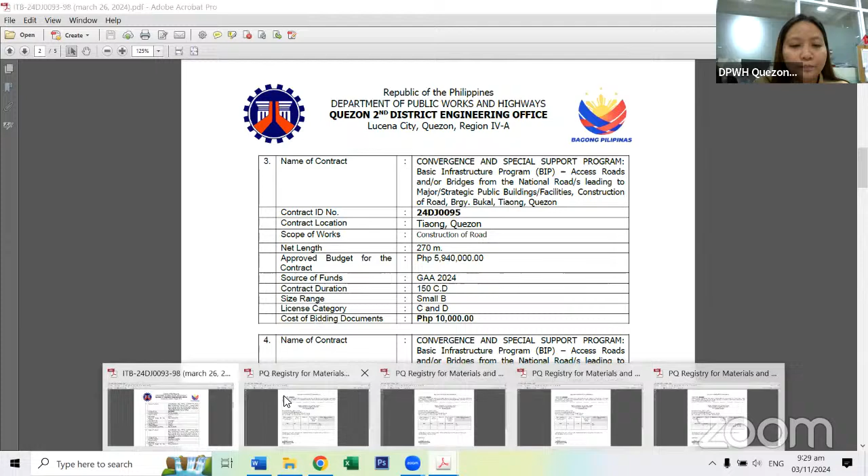Contract profile for 24DJ0095. Major categories of work RCP. Dimension 0.270 kilometers, and cost estimate for major categories 5,940,000 pesos, and similar categories of work RRP and RCTP.

Number 4, Convergence and Special Support Program, Basic Infrastructure Program, access roads and or bridges from the national roads, leading to major strategic public buildings, facilities, construction of road, Barangay Kinatihan 2, Candelaria, Quezon Province.

Contract ID number 24DJ0096. Net length 274.5 meters. Approved budget for the contract 5,940,000 pesos. Source of funds GAA 2024. Contract duration 150 calendar days. Size range small b. License category C and D. Cost of bidding documents 10,000 pesos.

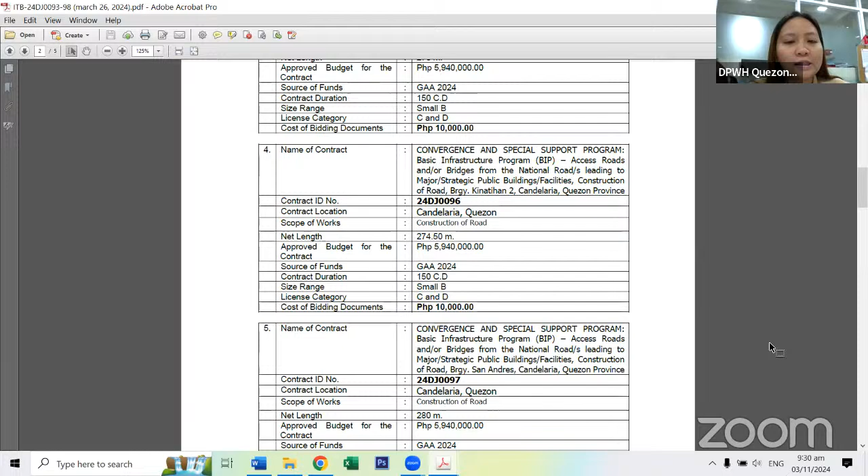Contract profile for 24DJ0096. Major categories of work is RCP. Dimension of 0.2745 kilometers. Cost of major category is 5,940,000 pesos. Similar major categories, RRP and RCTP.

Number 5 project, Convergence and Special Support Program, Basic Infrastructure Program, BIP, access roads and or bridges from the national roads leading to major strategic public buildings, facilities, construction of road, Barangay San Andres, Candelaria, Quezon Province.

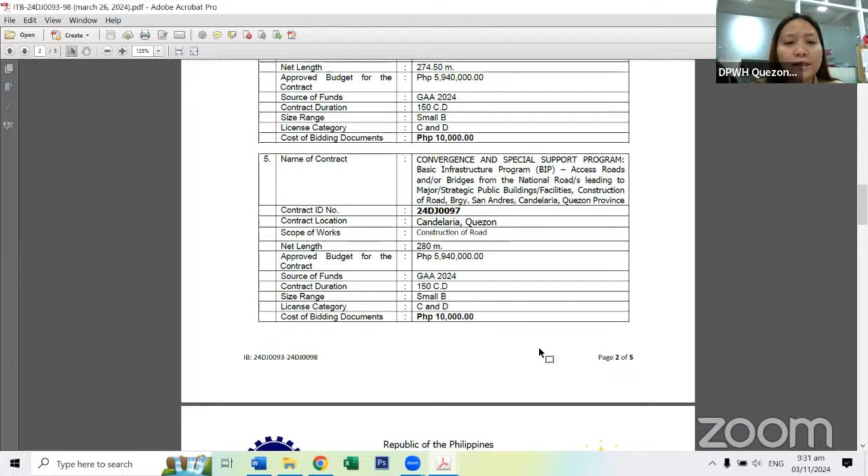Contract ID number 24DJ0097 with net length of 280 meters, ABC 5,940,000 pesos. Source of funds GAA 2024. Contract duration 150 calendar days. Size range small b. License category C and D. Cost of bidding documents 10,000 pesos.

For the contract profile of 24DJ0097, major categories of work RCP with a dimension of 0.28 kilometers and cost estimate of 5,940,000 pesos. Similar major categories of work are RRP, RCTP.

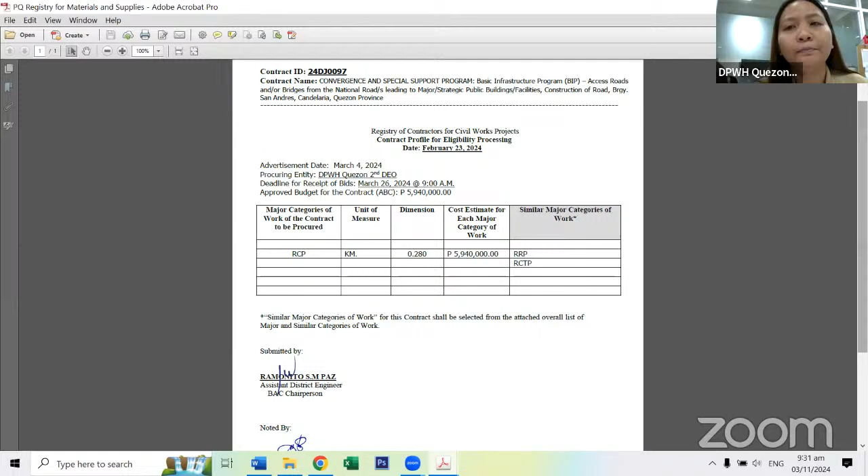Last project, Convergence and Special Support Program, Basic Infrastructure Program, BIP, multipurpose buildings, facilities to support social services, construction completion of multipurpose building evacuation center, Barangay Lutucan, Malabag, Sariaya, Quezon.

Contract ID number 24DJ0098. Approved budget for the contract, 4,950,000 pesos. Source of fund, GAA 2024. Contract duration, 180 calendar days. Size range, small b. License category, C and D. And cost of bidding documents, 5,000 pesos.

For the contract profile of 24DJ0098, major categories of work, BICWOPLS, 1 story, cost estimate of major category of work, 4,950,000 pesos. Similar major categories of work: BICWPHSCP, BICWPLSCP, BICWPHSDP, BICWPLSDP, BICWOPHS, BIH, BIL, BIM.

Bid opening is at March 26, 9 a.m.

First project po sa programmer. Start na po. Thank you. Good morning po. First project po natin is...

24DJ0093 is Convergence and Special Support Program, Basic Infrastructure Program, Access Roads and/or Bridges from the national roads leading to major strategic public buildings facilities. Construction of road, Barangay Tamisian, Tiaong, Quezon.

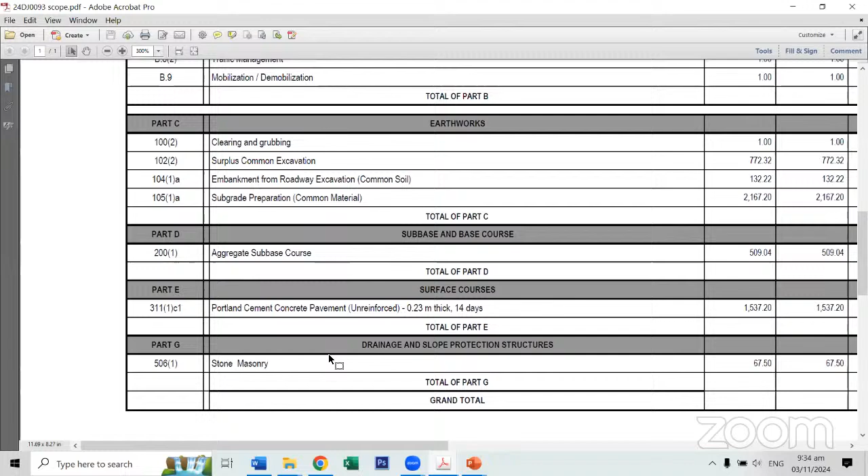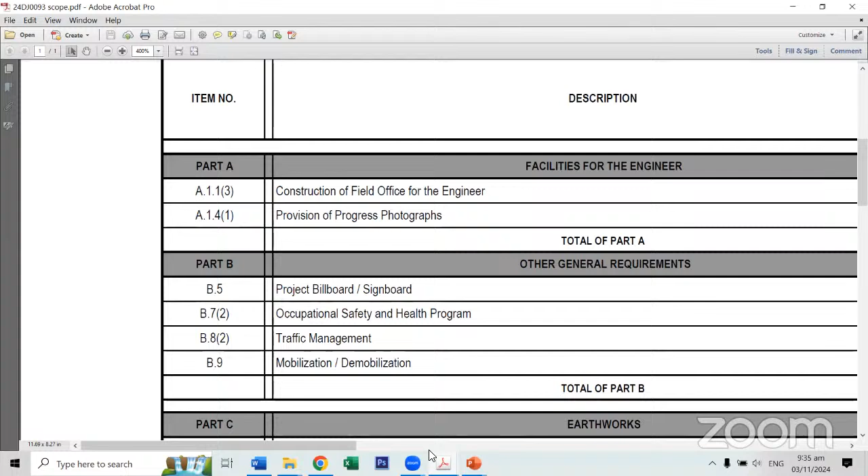Scopes of works. For scopes of works, we have Part A, facilities for the engineer, construction of field office for the engineer. We also have provision of progress photographs. For Part B, other general requirements, we have project billboard, signboard, occupational safety and health program, traffic management, mobilization and demobilization. For earthworks, we have clearing and grubbing, surplus common excavation, embankment from roadway excavation for common soil, and subgrade preparation for common material.

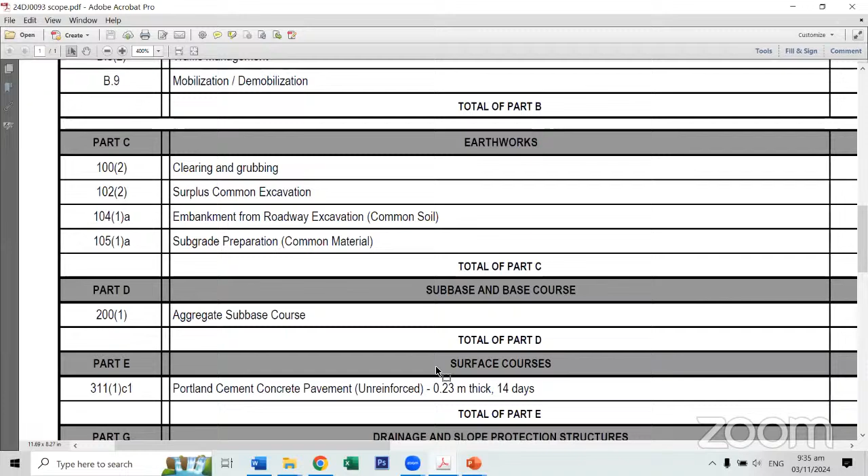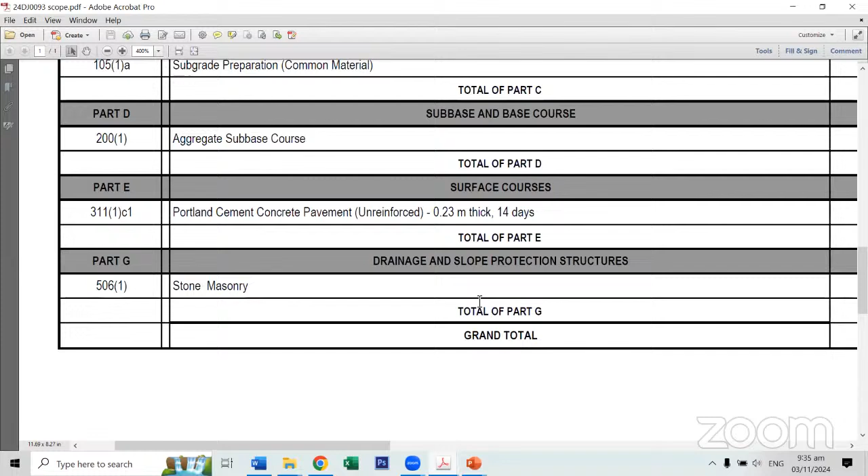For sub-base and base course, we have aggregate sub-base courses. For surface courses, we have Portland cement, concrete pavement, unreinforced, 0.23 meter thick, 14 days. And for drainage and slope protection structures, we have stone masonry.

Minimum equipment requirements: one portable mist-based sanitation test, one thermal scanner with rechargeable battery, one power sprayer with complete accessories, one low bed trailer, two dump truck, two backhoe, one bulldozer, one payloader, one motorized road grader, one vibratory roller, one water truck, two concrete vibrator, one concrete screeder, one concrete saw, one bar cutter single phase 25 millimeter, one sealer joint, and one chainsaw.

For the manpower requirements, we have one project manager, one project engineer with total 5 years experience, accredited materials engineer, one construction foreman, one first aider, and one safety officer.

The approved budget for the contract is 5,940,000 pesos, and the contract duration is 150 calendar days. Thank you. Thank you po, Engineer Dan. Any questions po?

Let's proceed to the next project.

Next project is contract ID 24DJ0094, the Convergence and Special Support Program, Basic Infrastructure Program, Access Roads and/or Bridges from the national roads leading to major strategic public buildings and facilities. Construction of road, Barangay Pahinga Sur, Candelaria, Quezon.

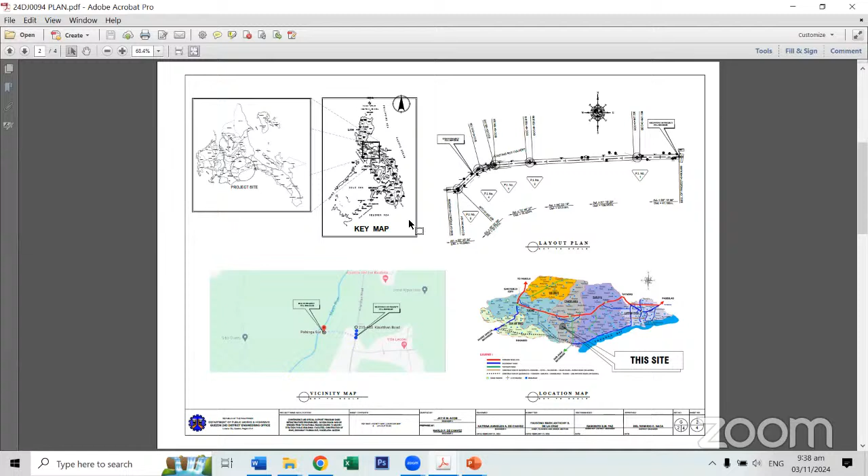Plans of the proposed project. This page shows a title page with the net length of 220.5 meters. This page shows the layout plan, the location map, and the vicinity map of the project. This page shows the summary of quantities. This page shows the typical road cross section, the straight line diagram, and the construction notes.

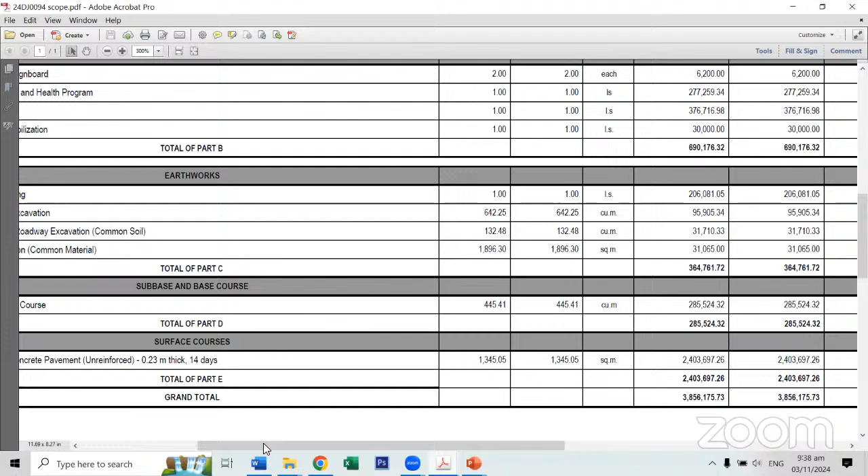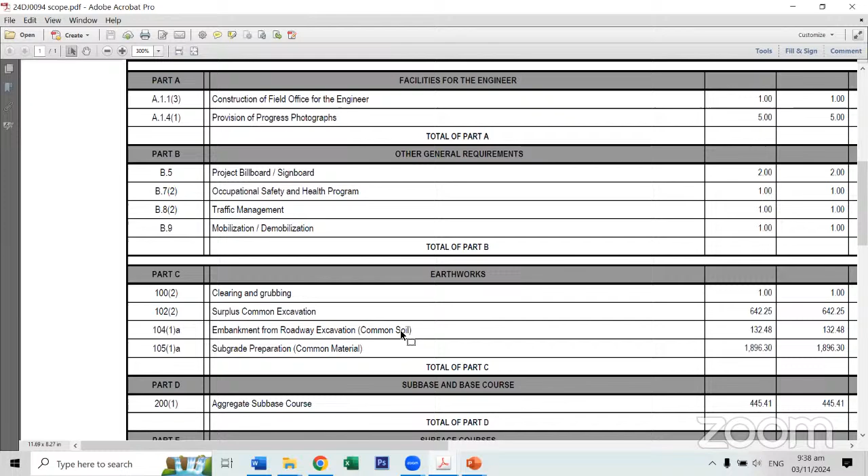Plans of the scopes of works. For the scope of works, we have facilities for the engineer, construction of field office for the engineer, and provision of progress photographs. For other general requirements, we have project billboard, signboard, occupational safety and health program, traffic management, and mobilization/demobilization. For earthworks, we have clearing and grubbing, surplus common excavation, embankment from roadway excavation for common soil, and subgrade preparation for common material.

Under sub-base and base course, we have aggregate sub-base course. Under surface courses, we have Portland cement concrete pavement, unreinforced, 0.23 meters thick, for 14 days.

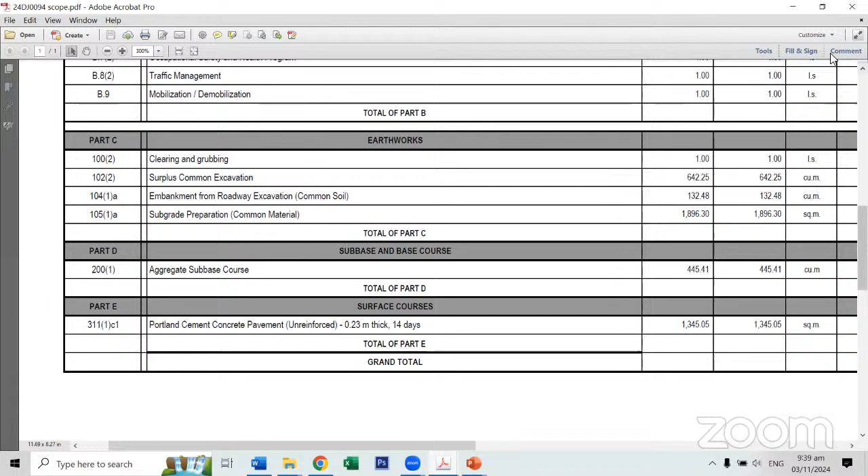Minimum equipment requirements: one portable mist-based sanitation test, one thermal scanner with rechargeable battery, one power sprayer with complete accessories, one low bed trailer, two dump trucks, two backhoes, one bulldozer, one payloader, one motorized road grader, one vibratory roller, one water truck, one concrete vibrator, one concrete screeder, one concrete saw, one bar cutter single phase 25 millimeter, one sealer joint, and one chainsaw.

For the manpower requirements, we have one project manager, one project engineer, one accredited materials engineer, one construction foreman, one first aider, and one safety officer. The approved budget for the contract is 4,950,000 pesos and the contract duration is 150 calendar days.

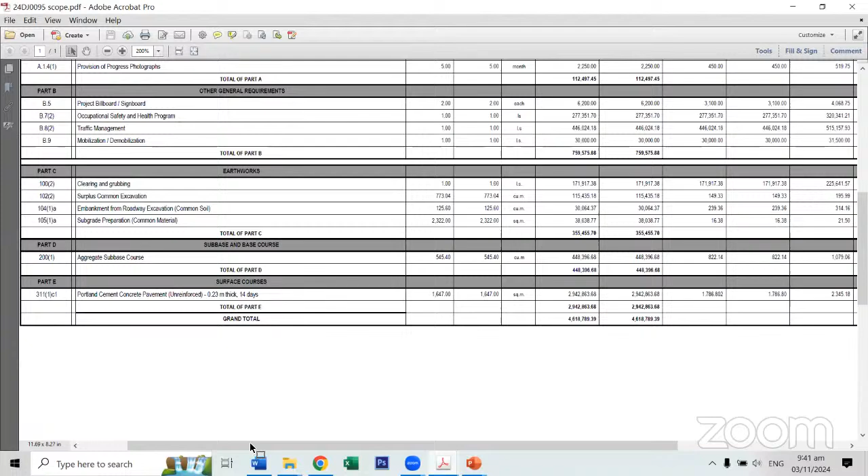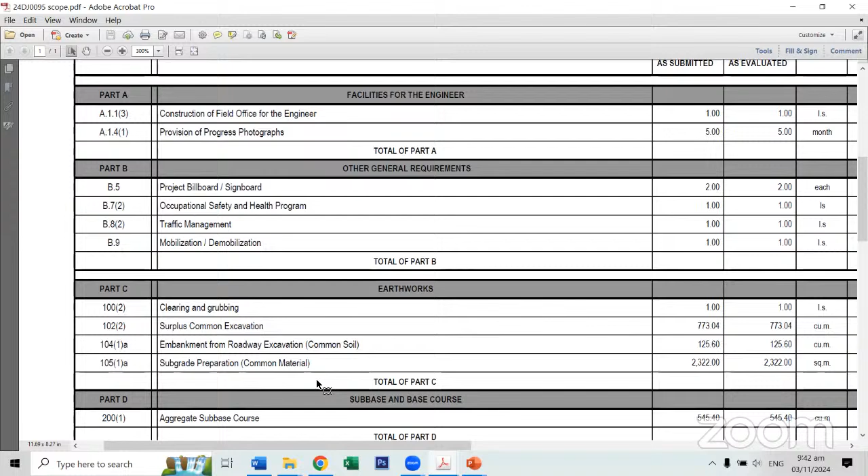For the scope of works, we have facilities for the engineer, construction of field office for the engineer, and provision of progress photographs. Under general requirements, we have project billboard and signboard, occupational safety and health program, traffic management, mobilization, demobilization. For earthworks, we have clearing and grubbing, surplus common excavation, embankment from roadway excavation for common soil, and subgrade preparation for common materials.

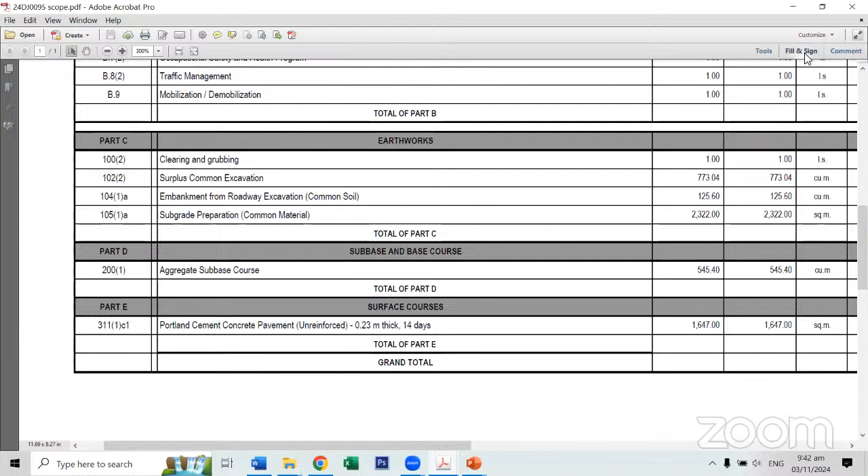Under sub-base and base course, we have aggregate sub-base course. For surface courses, we have Portland cement concrete pavement, unreinforced, 0.23 meters thick, 14 days.

For the minimum equipment requirements, we have one portable mist-based sanitation test, one thermal scanner with rechargeable battery, one power sprayer with complete accessories, one low bed trailer, two dump trucks, two backhoes, one bulldozer, one payloader, one motorized road grader, one vibratory roller, one water truck, two concrete vibrators, one concrete screeder, one concrete saw, one bar cutter, single phase, 25 millimeter, one sealer joint, and one chainsaw.

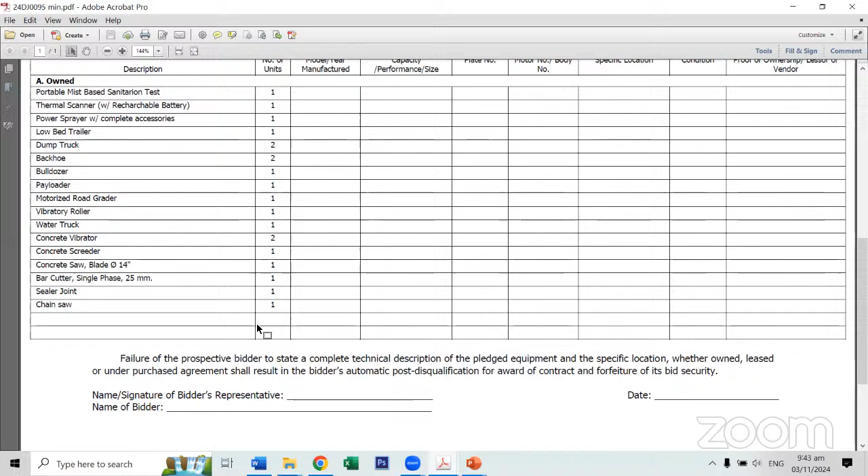For the manpower requirements, we have one project manager, one project engineer with total experience of 5 years, one accredited materials engineer, one construction foreman, one first aider, and one safety officer.

The approved budget for the contract is 5,940,000 pesos, and the contract duration is 150 calendar days. Thank you.

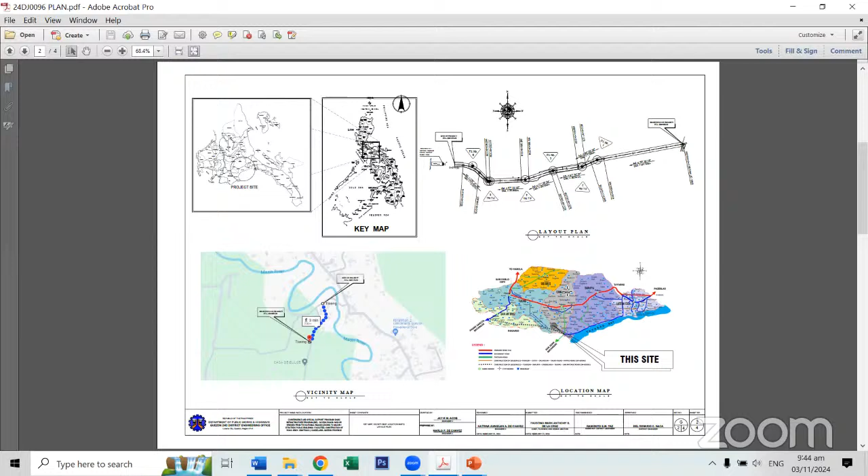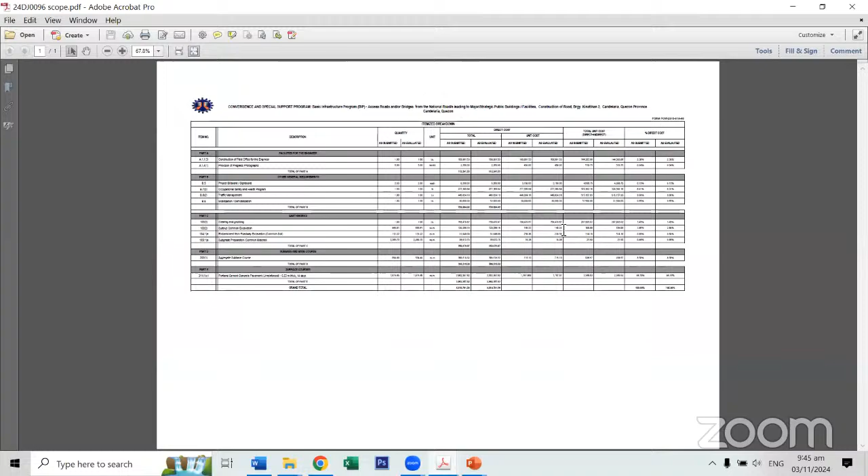Scope of works. For Part A, facilities for the engineer, construction of field office for the engineer. We also have provision of progress photographs.

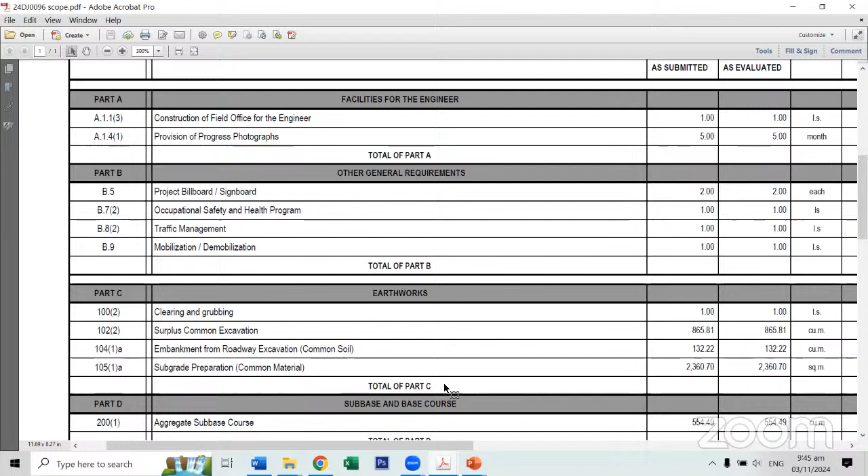Under Part B, other general requirements, we have project billboard, signboard, occupational safety and health program, traffic management, and mobilization, demobilization. Under Part C, earthworks, we have clearing and grubbing, surplus common excavation, embankment from roadway excavation for common soil, subgrade preparation for common material.

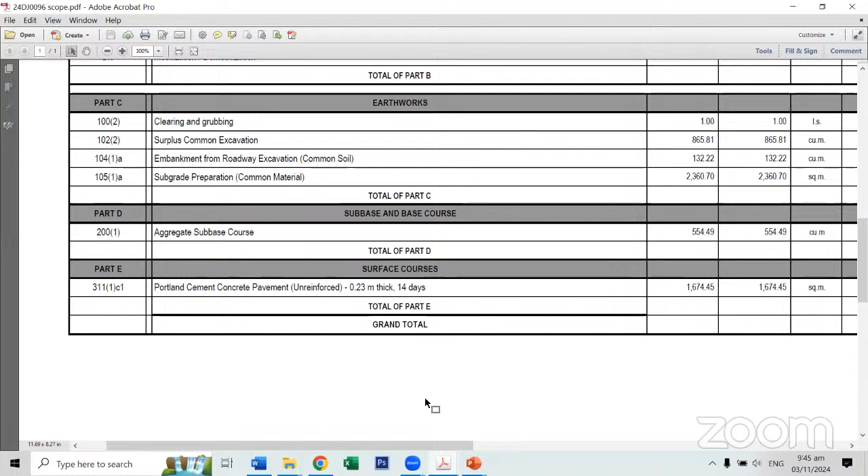For Part D, sub-base and base course, we have aggregate sub-base course. Under surface courses, we have Portland cement concrete pavement, unreinforced, 0.23 meter thick, 14 days.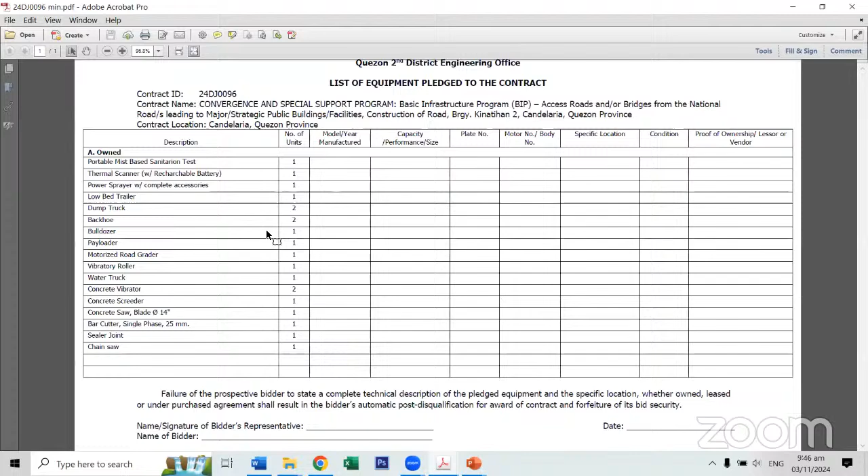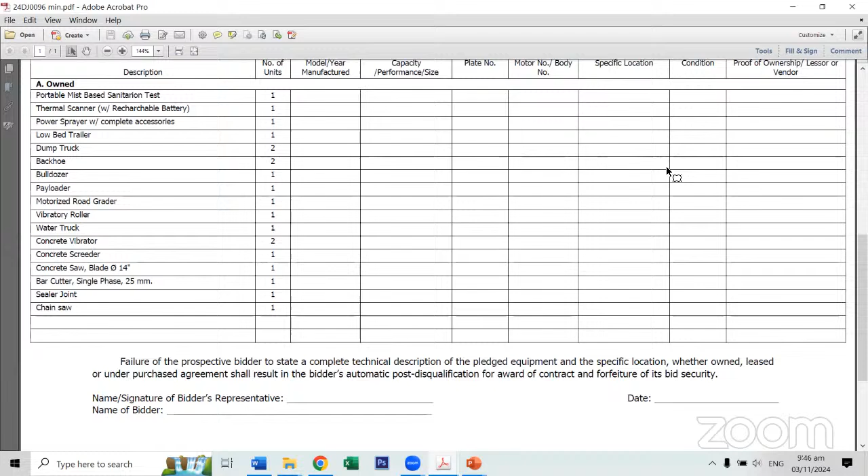For minimum equipment requirements, we need one portable mist-based sanitation test, one thermal scanner with rechargeable battery, one power sprayer with complete accessories, one low bed trailer, two dump trucks, two backhoes, one bulldozer, one payloader, one motorized road grader, one vibratory roller, one water truck, two concrete vibrators, one concrete screeder, one concrete saw, one bar cutter single phase 25 millimeter, one sealer joint, and one chainsaw.

For manpower requirements, we need one project manager with total 5 years experience, also one project engineer, one accredited materials engineer, a construction foreman, a first aider, and a safety officer.

The approved budget for the contract is 5,940,000 pesos, and the contract duration is 150 calendar days. Thank you.

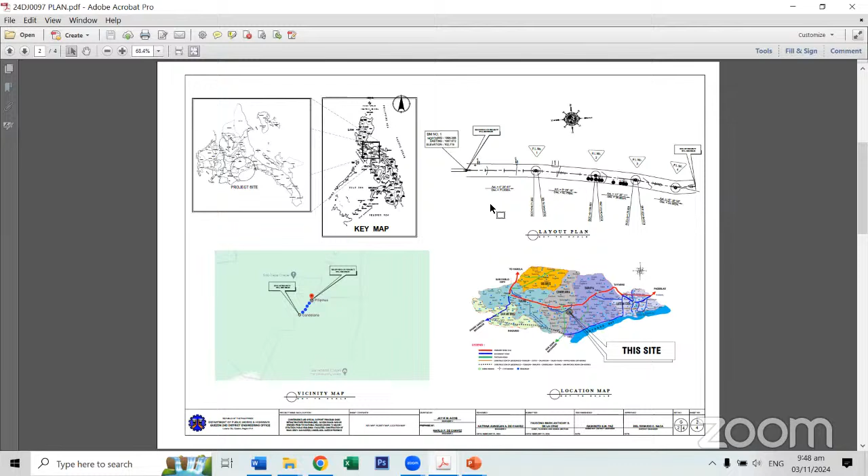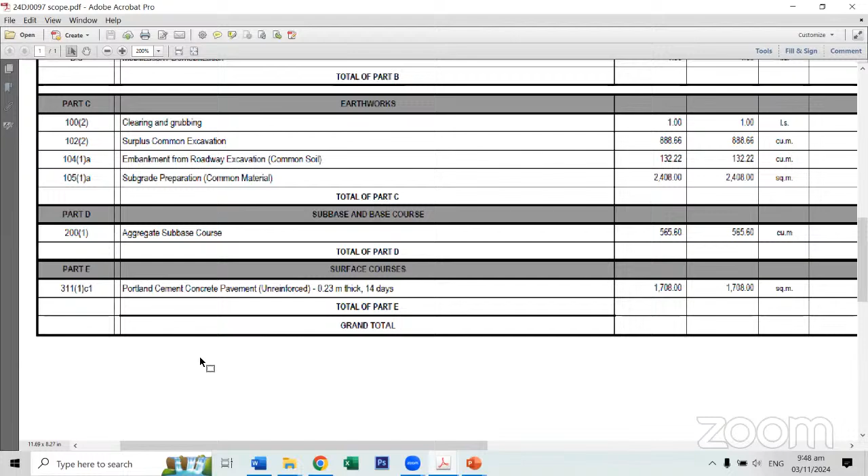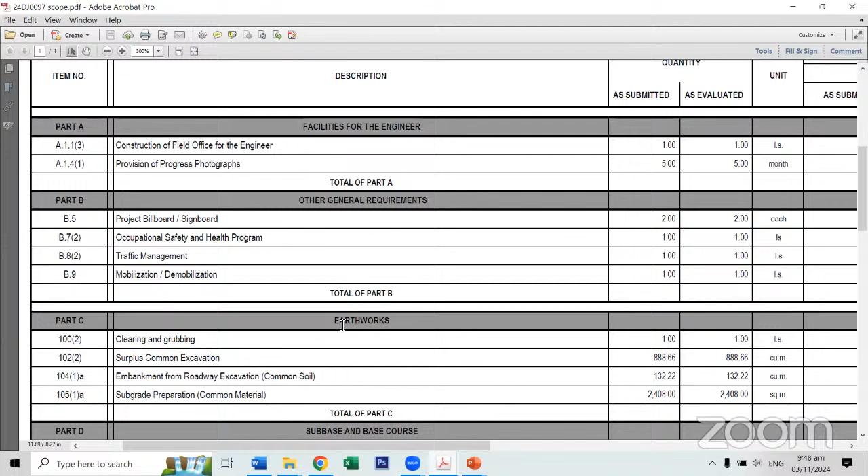Scope of works. For Part A, facilities for the engineer, we have construction of field office for the engineer and provision of progress photographs. For other general requirements, we have project billboard and signboard, occupational safety and health program, traffic management, and mobilization, demobilization. For earthworks, we have clearing and grubbing, surplus common excavation, embankment from roadway excavation for common soil, and subgrade

preparation for common material. Under sub-base and base course, we have aggregate sub-base course. And under surface courses, we have Portland cement concrete pavement, unreinforced, 0.23 meters thick, 14 days.

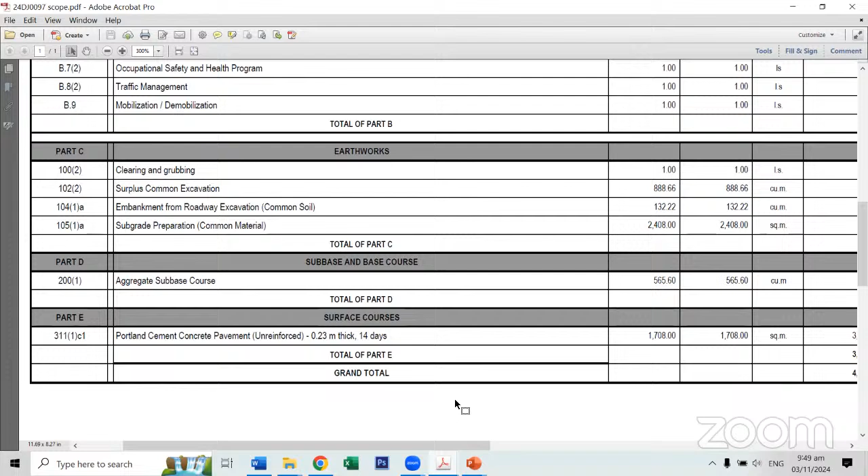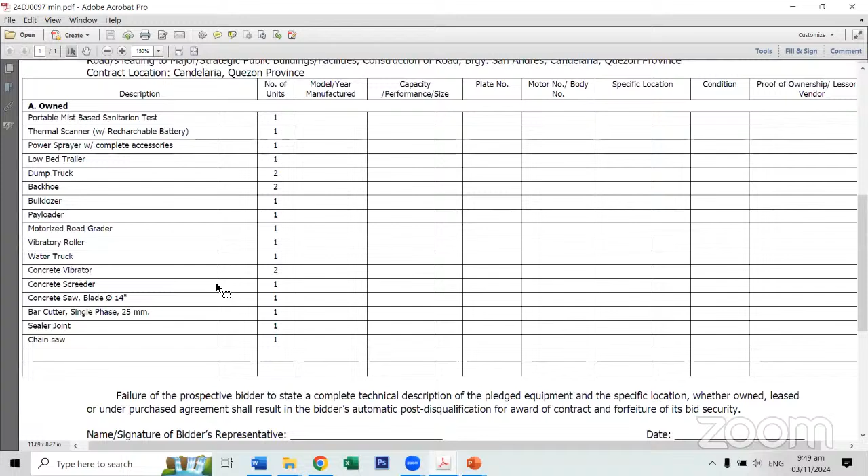Minimum equipment requirements. For the project, here are the list of the minimum equipment requirements: 1 portable mist-based sanitation test, 1 thermal scanner with rechargeable battery, 1 power sprayer with complete accessories, 1 low bed trailer, 2 dump trucks, 2 backhoes, 1 bulldozer, 1 payloader, 1 motorized road grader, 1 vibratory roller, 1 water truck, 2 concrete vibrators, 1 concrete screeder, 1 concrete saw, 1 bar cutter, 1 sealer joint, and 1 chainsaw.

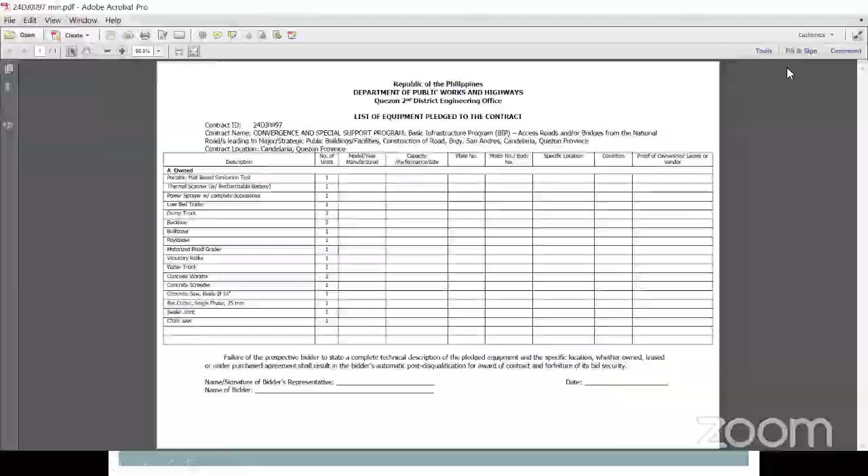For the minimum manpower requirements, we need 1 project manager with total 5 years experience, also 1 project engineer with total experience of 5 years, accredited materials engineer 1, a construction foreman, a first aider, and a safety officer.

The approved budget for the contract is 5,940,000 pesos, and the contract duration is 150 calendar days. Thank you.

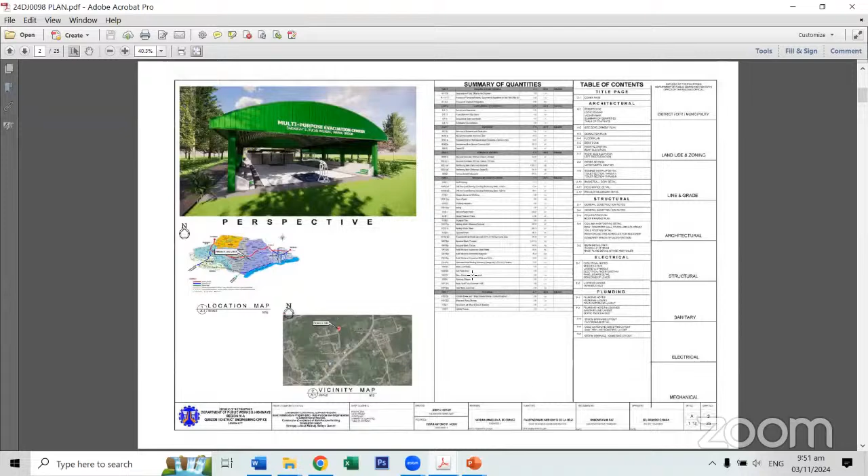Title page. Perspective, location map, vicinity map, summary of quantities, and table of contents. Site development plan.

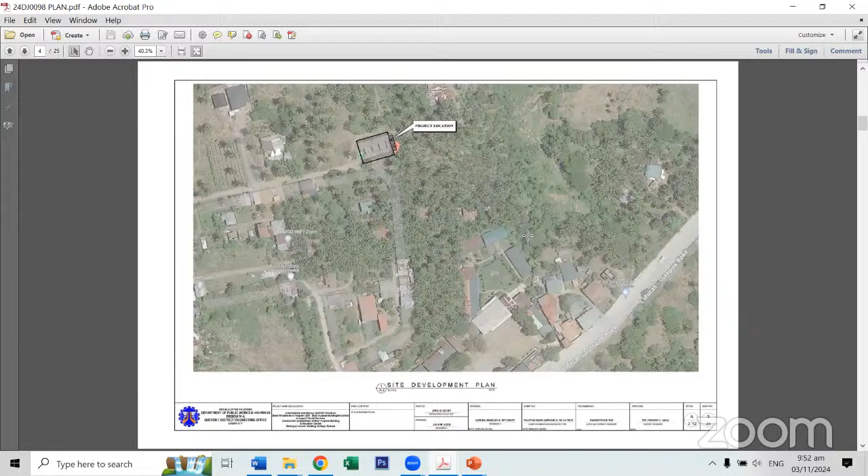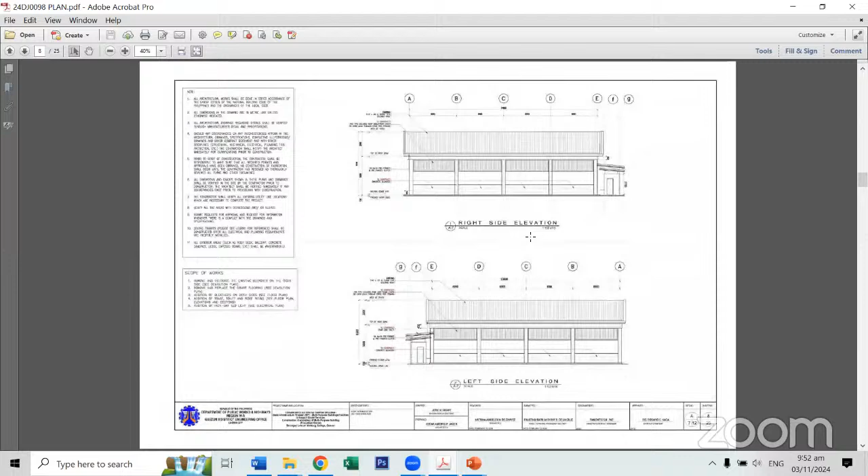Demolition plan. Floor plan. Roof plan. Front elevation and rear elevation. Right side elevation and left side elevation. Cross section and longitudinal section.

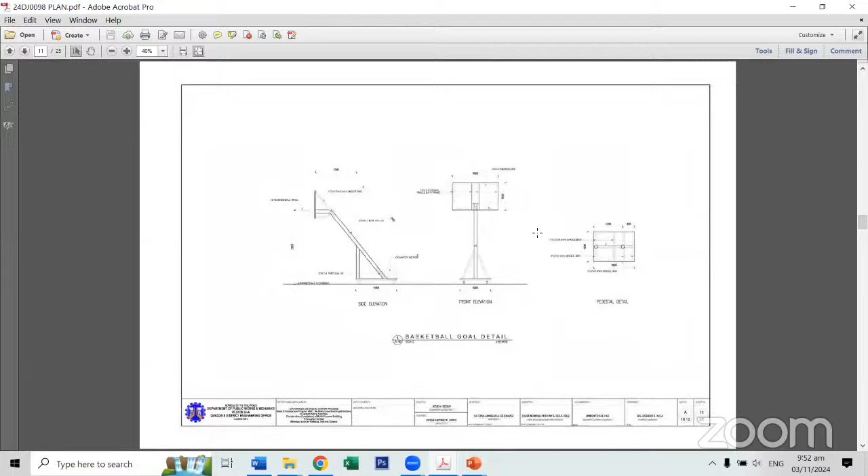Signage blow up detail. Toilet section through AA and toilet section through BB. Basketball goal detail. Field office detail. DPWH standard project billboard.

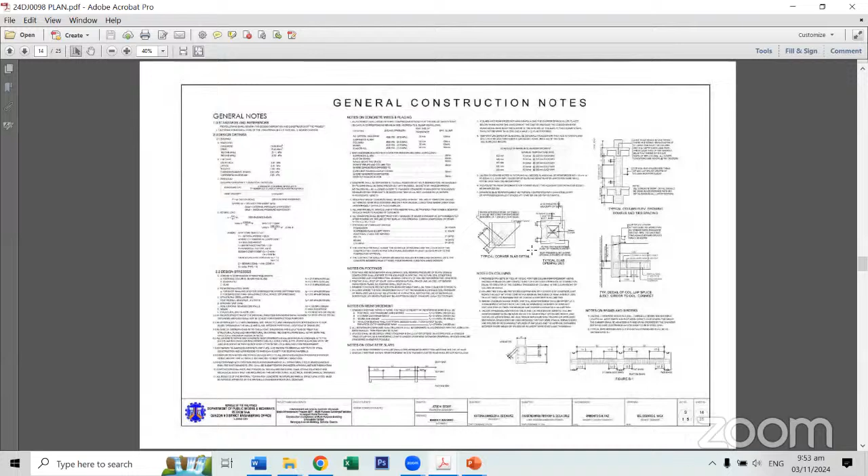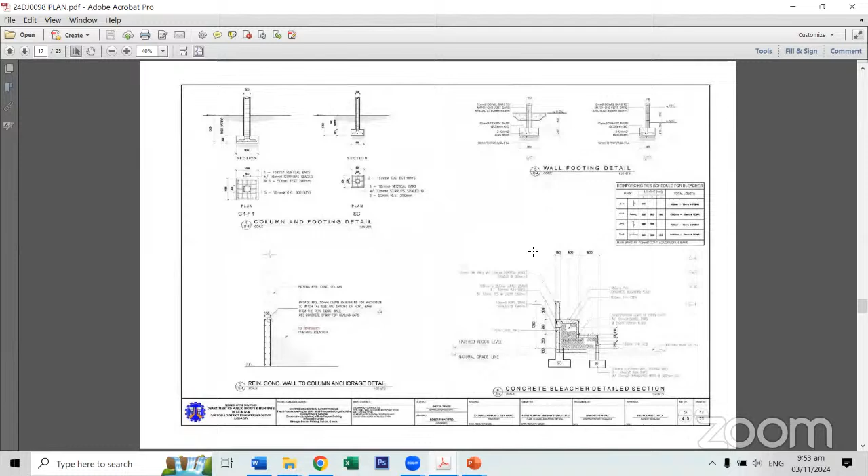General construction notes. Foundation plan and roof framing plan. Column and footing detail. Reinforced concrete wall to column anchorage detail. Wall footing, bleacher detail. Beam detail, schedule of beams, and base plate detail for stage and toilet.

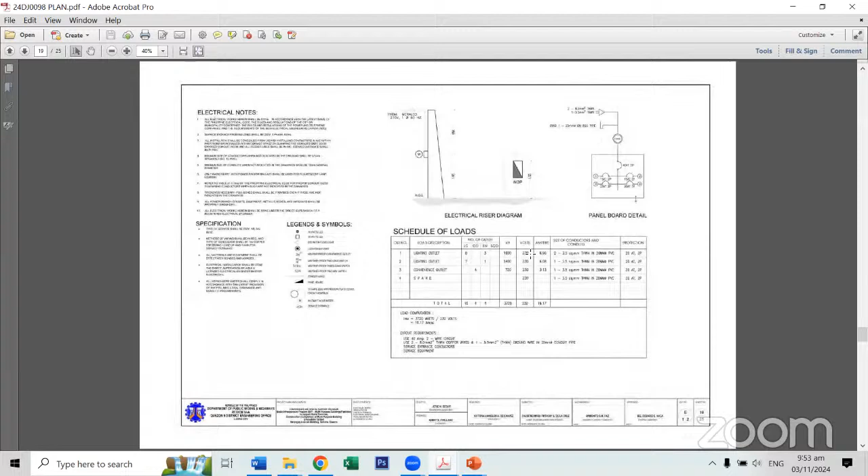Electrical notes. Schedule of loads. Lighting layout, power layout. Cold water line layout.

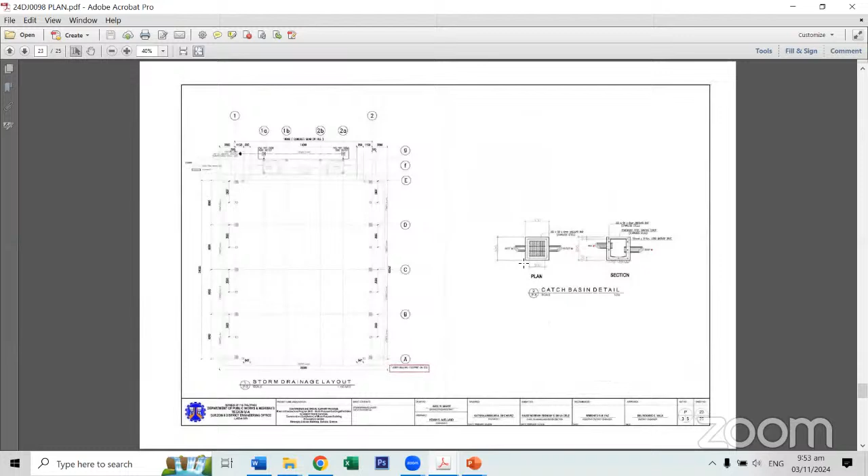Septic tank detail and sanitary line layout. Storm drainage layout and catch basin detail. Cold water line isometric layout and sanitary line isometric layout. Storm drainage isometric layout.

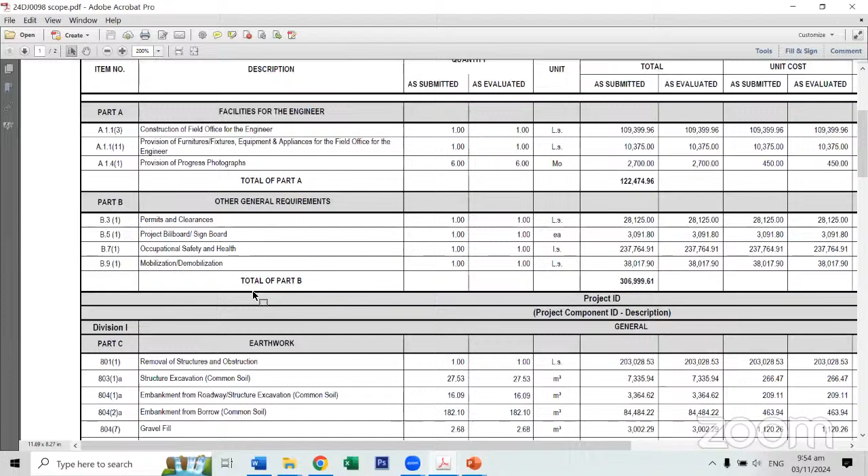Scope of work. Facilities for the engineer: construction of field office for the engineer, provision of furnitures and fixtures, equipment and appliances for the field office for the engineer.

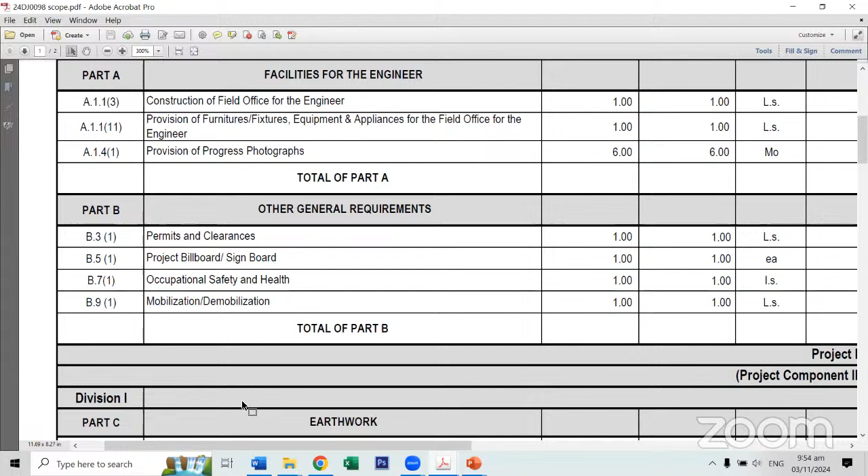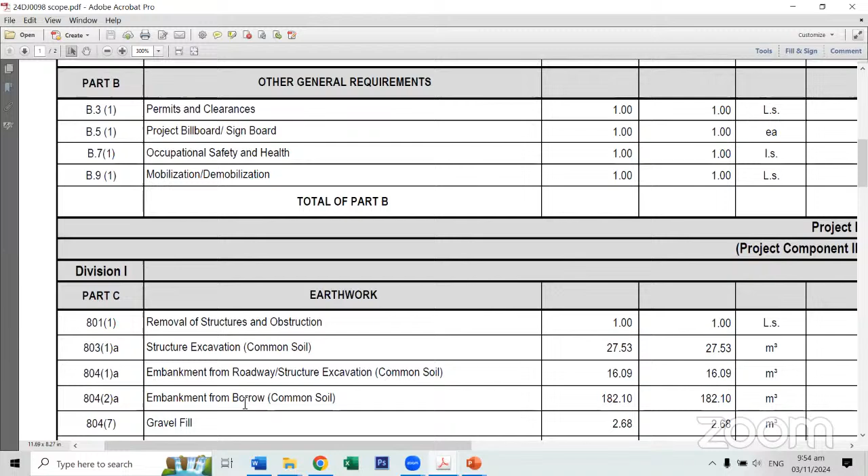Provision of progress photographs. Part B, other general requirements: permits and clearances, project billboard or signboard, occupational safety and health, mobilization or demobilization.

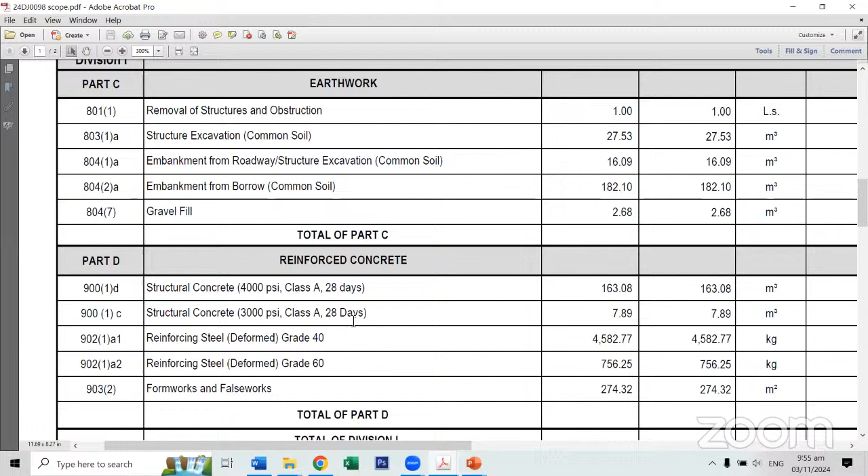Under Division 2, Part E, finishing and other civil works: soil poisoning, CHB non-load bearing including reinforcing steel, 100 mm and 150 mm.

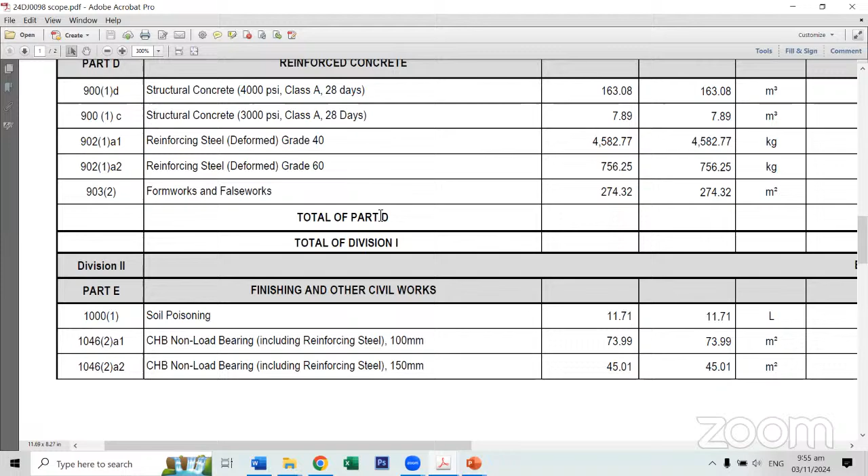Wooden doors and windows, doors flush, finishing hardware, railing, cement plaster finish, glazed tiles and trims, painting works for masonry or concrete and steel, textured finish, pre-painted metal sheet above 0.427 mm rib type long span.

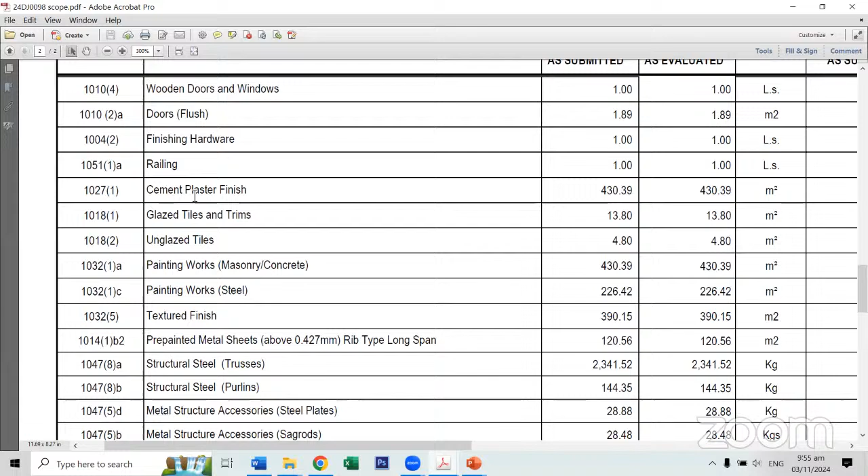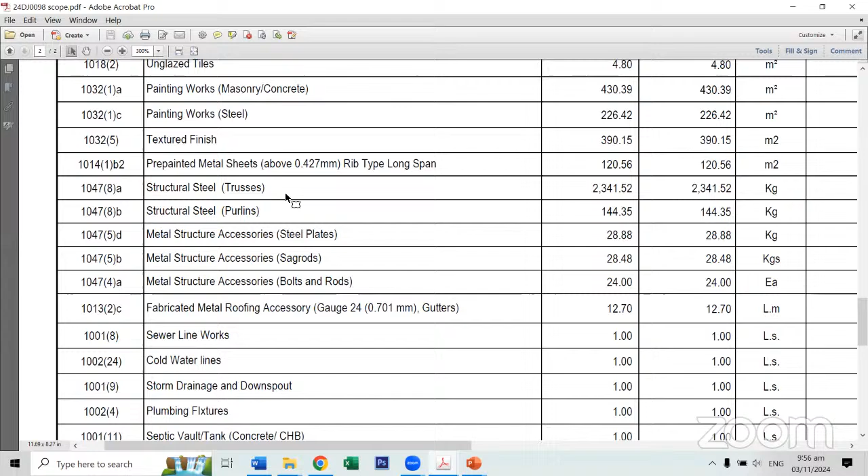Structural steel trusses, purlins, metal structures, accessories for steel plates, sag rod and bolts. Fabricated metal roofing accessories, sewer line works, cold water line works, storm drainage and downspout.

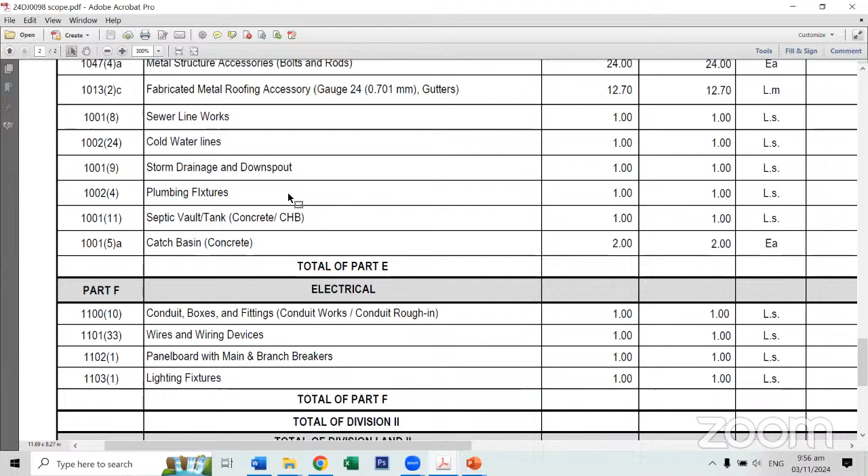Plumbing fixture, septic vault, catch basin. Part F, electrical: conduit boxes and fittings, wires and wiring devices, panel board with main and branch breakers, lighting fixtures.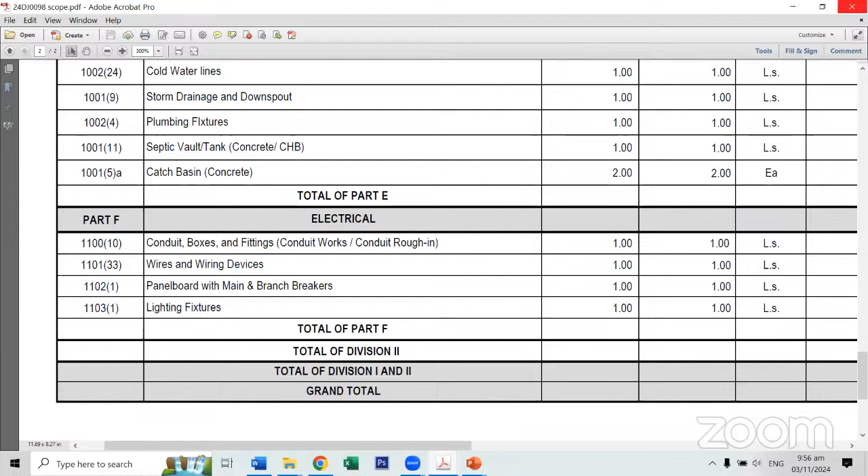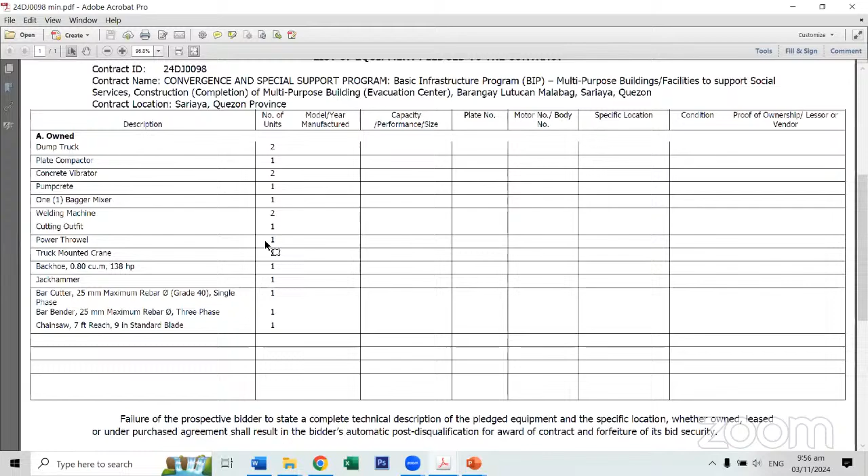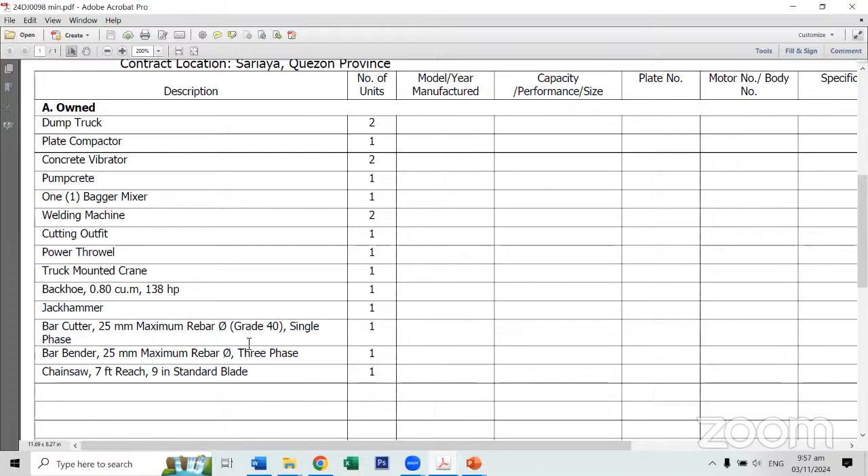Minimum equipment requirements: 2 dump trucks, 1 plate compactor, 2 concrete vibrators, 1 pumpcrete, 1 bagger mixer, 2 welding machines, 1 cutting outfit, 1 power trowel, 1 truck mounted crane, 1 backhoe, 1 jackhammer, 1 bar cutter, 1 bar bender, 1 chainsaw.

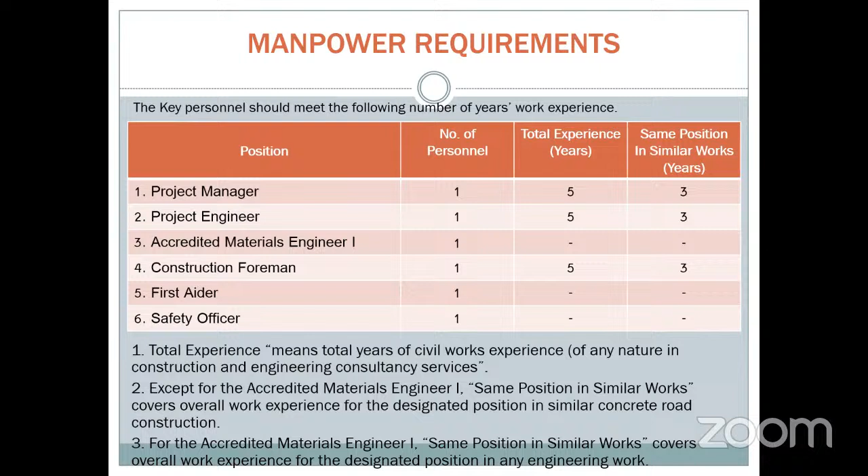Manpower requirements: 1 project manager with total of 5 years experience, 1 project engineer with total of 5 years experience, 1 accredited materials engineer, 1 construction foreman with total of 5 years experience, 1 first aider, and 1 safety officer.

Approved budget for the contract: 4,950,000 pesos, with contract duration of 180 calendar days.

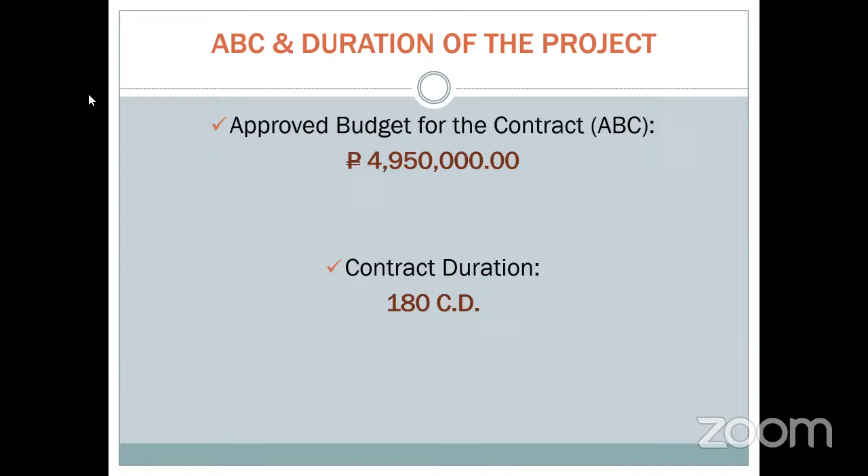Submission of bids, the 2 envelope system: 1 original copy of the technical proposal sealed in one envelope, and 1 original copy of the financial bid proposal placed in one sealed envelope.

Bidding date is March 26, 2024. Submission of bidding documents until 9 a.m. only, and opening of bidding documents at 9 o'clock a.m.

Bids must be duly received by the Bids and Awards Committee Secretariat through 1, manual submission, and 2, online or electronic submission as per DO number 87, series of 2020.

Advertisement electronic bids: Quezon2@dpwh.gov.ph is the assigned email address of the Quezon 2 DEO where electronic bids shall be submitted and received. This is specified in the invitation to bid and bidding documents of the contract which allows electronic submission of bids.

Upon posting of the invitation to bid and bidding documents in the DPWH PhilGEPS website in a conspicuous place, pursuant to Section 21 of the IRR of RA 9184, the BAC Secretariat created a folder in the electronic bid submission and receipt SharePoint site, the eBid portal, for the contract ID allowing electronic submission of bids. The folder name should be consistent with the contract ID scheme provided under DO number 33, series of 2018.

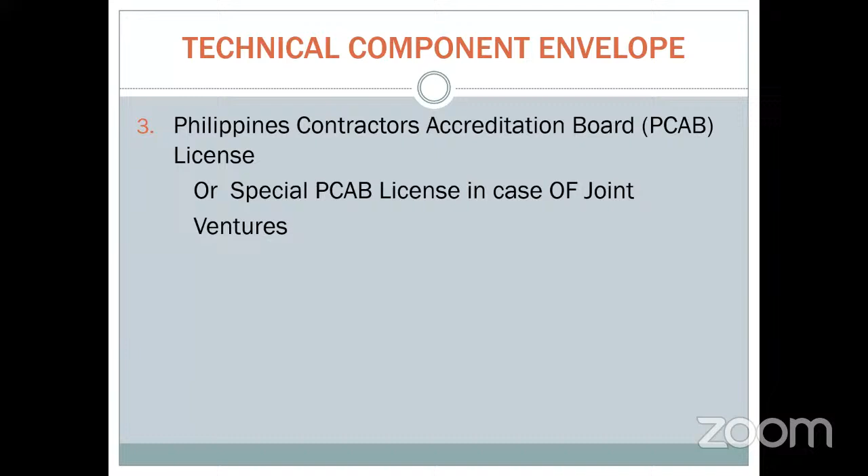For financial documents, number 1, the NFCC must be at least equal to the ABC to be bid. The NFCC is the current assets minus current liabilities, minus the value of all outstanding or uncompleted portions of the projects under ongoing, including awarded contracts yet to be started, coinciding with the contract to be bid.

Number 2, the audited financial statement showing, among others, the prospective bidder's total current assets and liabilities, stamp received by the BIR or its duly accredited and authorized institution for the preceding calendar year, which should not be earlier than 2 years from the date of bid submission.

Number 3, the bid security. An original copy of notarized bid security declaration using the prescribed format, or any form of bid security in an amount equal to a percentage of the ABC in accordance with the following schedule of IRR Section 27.2. A, the cash or the cashier's or manager's check issued by a universal or commercial bank, 2% of ABC. B, the bank draft or guarantee or irrevocable letter of credit issued by a universal or commercial bank, use forms DPWH Infra 10 or 11, 2% of ABC. C, the surety bond callable on demand issued by a surety or insurance company duly certified by the Insurance Commission as authorized to issue such security, 5% of ABC.

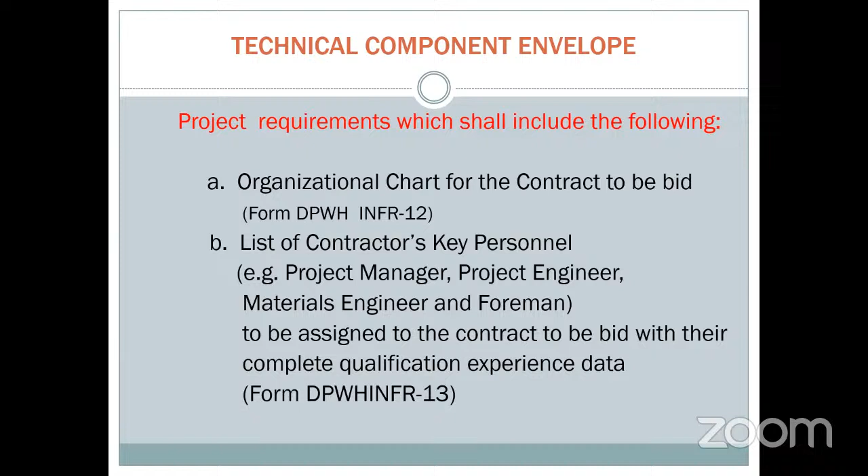C, duly signed list of contractor's pledged major equipment units, owned or under purchase agreement, supported by proof of ownership or certification of availability of equipment from the equipment lessor or vendor for the duration of the project. This equipment must meet the minimum major equipment requirements for the contract set in the BDS form DPWH Infra 14. Please note that pledged equipment must comply with DO number 9 and DO number 58, both series of 2012.

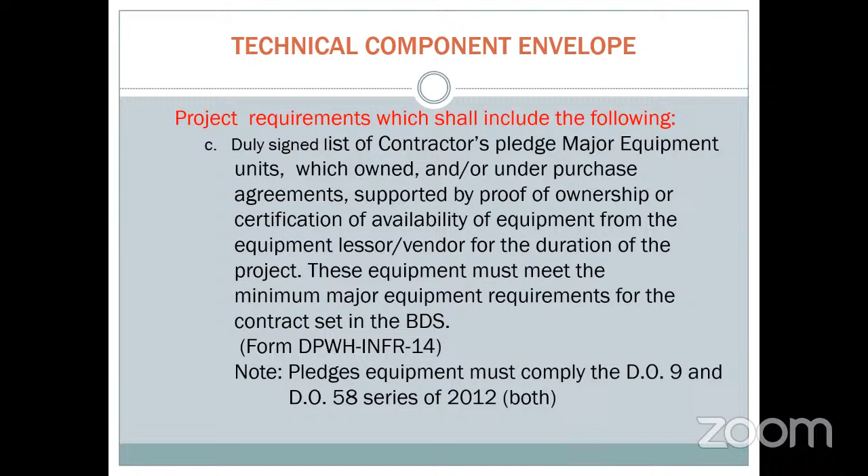D, the original duly signed omnibus sworn statement in accordance with Section 25.3 of the IRR, and if applicable, original notarized secretary's certificate in case of a corporation, partnership, or cooperative, or special power of attorney of all members of the joint venture, giving full power and authority to its officer to sign the OSS and do acts to represent the bidder.

For Class B documents, if applicable, duly signed joint venture agreement in accordance with RA number 4566 and its IRR, in case the joint venture is already in existence.

The checklist of the financial component envelope, the second envelope. The financial proposal shall contain the following: 1. Original of duly signed and accomplished financial bid form. 2. Original of duly signed bid prices, bill of quantities, form DPWH Infra 16 and 17. 3. The duly accomplished detailed estimate form, including summary sheets indicating the unit prices of construction materials, labor rates, and equipment rental used in coming up with the bid. And 4. Duly signed cash flow by quarter, form DPWH Infra 18.

Duly notarized affidavit of site inspection. The construction safety and health program, intended for the specific project only, must be attached in the technical documents. The construction safety and health program should also be complete in accordance with the DOLE checklist and DOLE DO number 13, series of 1998. It includes the DOLE application form, the construction safety and health officer, the first aider, TESDA certificate of heavy equipment operator and or critical workers, testing and inspection of heavy equipment if applicable, and other pertinent documents for the approval of the program.

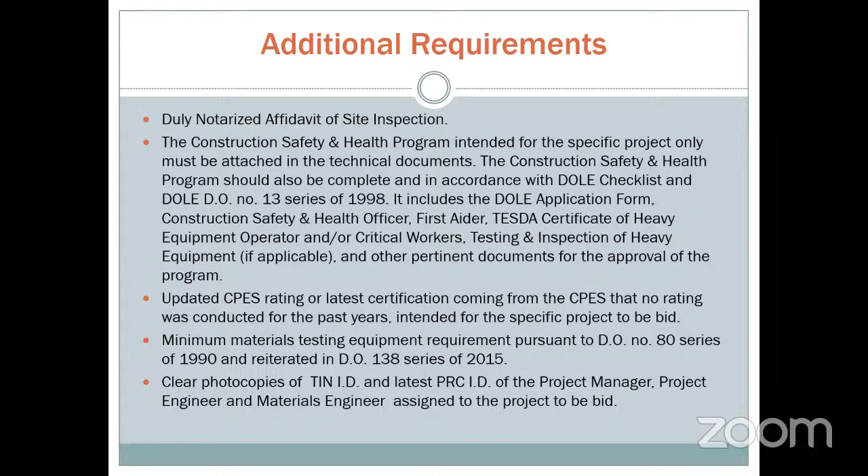Updated CPES rating or latest certification from the CPES, noting if no rating was conducted for the past years intended for the specific project to be bid. Minimum material testing equipment requirement pursuant to DO number 80 series of 1990 and reiterated in DO number 138 series of 2015. Clear photocopies of TIN ID and latest PRC ID of the project manager, project engineer, and materials engineer assigned to the project to be bid.

Criteria of eligibility screening, preliminary examination of bids, evaluation of bids, and post-qualification. As per the 2016 revised IRR of RA 9184 and latest GPPB issuances, the first envelope shall be opened to determine compliance with the documents required to be submitted for eligibility and technical requirements as prescribed in the IRR. The BAC shall check the submitted documents of each bidder against the checklist of requirements to ascertain if they are all present, using a pass-fail criterion.

For every document required that is present, it shall be rated pass. But in case of failure to include any of the requirements, resulting in incomplete required documents, it shall be considered failed.

Otherwise, the BAC shall rate the first envelope pass. Immediately after determining the compliance of the first envelope, the BAC shall open the second envelope, or the financial document, again using the pass-fail criterion in determining compliance based on the checklist requirements. When the bid price exceeds the approved budget for the contract, or the ABC, it is automatically rated as failed.

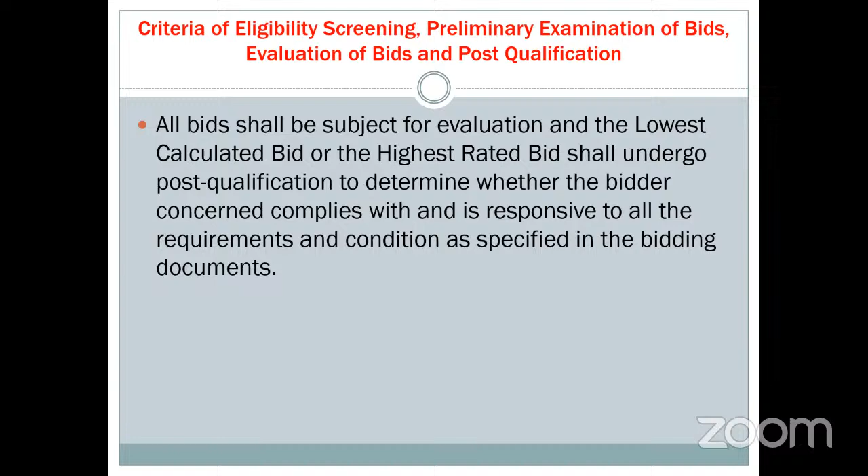All bids shall be subject for evaluation, and the lowest calculated bid or the highest rated bid shall undergo post-qualification to determine whether the bidder concerned complies with and is responsive to all the requirements and conditions specified in the bidding documents.

Additional information on entering into contract requirements to be complied with by the winning bidder: 1. Construction method using Form DPWH Infra 45. 2. Construction schedule in the form of precedence diagram and bar chart with S-curve and cash flow, including the duration of the project or number of days, using Form DPWH Infra 46. 3. The manpower schedule using Form DPWH Infra 47. 4. The equipment utilization schedule using Form DPWH Infra 48. 5. Clear photocopies of TIN ID and latest PRC ID of the project manager, project engineer, and materials engineer assigned to the project. 6. Performance security or the performance security declaration.

7. The contractor's all risk insurance. 8. For joint venture, the JVA or, PCAB special JV license. 9. CSHP, initially approved by the HOPE and DOLE concurrence.

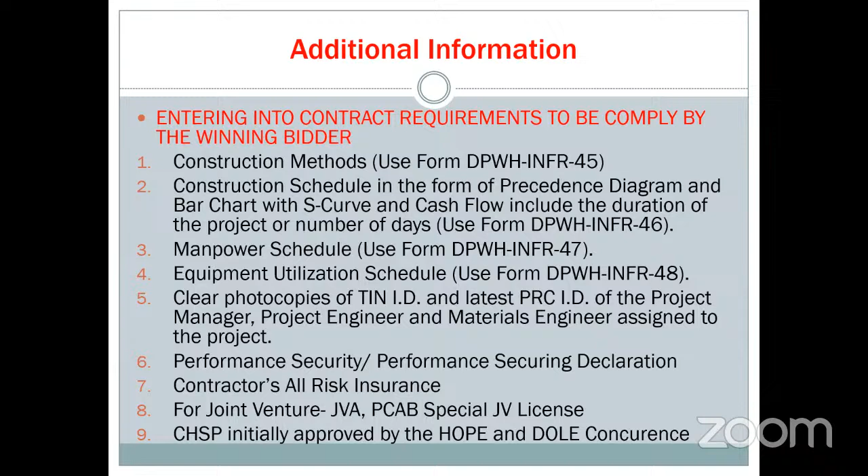Reminder to bidders who will submit manually and to bidders who submitted their bids online, to submit the original documents. Submit documents with table of contents, paginated and book-bound with ear tags, pursuant to DO number 90 series of 2002. 2. The proposal booklet should be signed and attached in the technical envelope. There should be documentary stamps on the bidder's bond and all other notarized documents.

The materials engineer should be accredited, and the certificate of accreditation should be updated, intended for this specific project. The estimate in the summary sheet must be in detail. The contractor's authorized representative must present their valid company ID and any government-issued ID.

Reminder to all bidders: please use A4 size bond paper for the technical and financial bid proposal. Use the prescribed Infra form, which can be found in the bid proposal booklet updated March 31, 2021. DO 35 series of 2008, the guidelines in the implementation of the three-strike policy in procurement of civil works and consultancy services contracts by the department, and reiterated in DO number 17 series of 2015, the three-strike policy in the procurement of contracts for infrastructure works, goods, and consulting services. Thank you po.